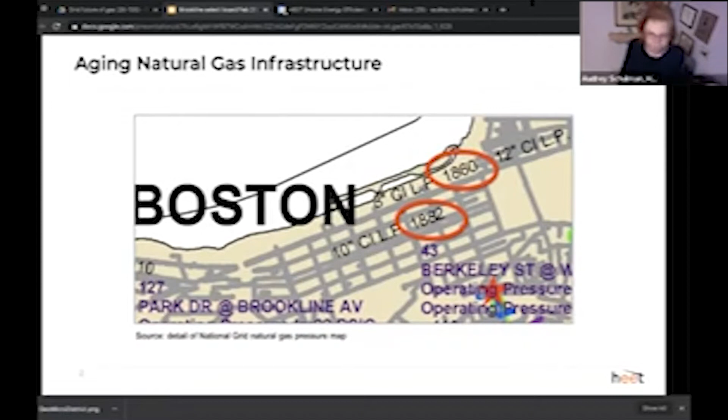As you probably all well know, in the Massachusetts area, and particularly in National Grid area, there's a lot of aging gas infrastructure. Here's a detail of a National Grid map showing two pipes in Back Bay dating back to the 1800s that are still in use. So you can imagine pipes that old are going to leak. And there's also a safety concern. So the gas utilities have a 20-year plan to replace all of the aging leak-prone pipes.

Here are just 5 years of utility reported work sites. And the total cost of this will be greater than the depreciated value of the system in the ground. So they're going to pump a lot of money into this system, and it's a fossil fuel system. And we know in Massachusetts, because of our state mandated emissions requirements, we will not be using gas past 2050. So this approximately $17 billion worth of cost will likely be stranded assets.

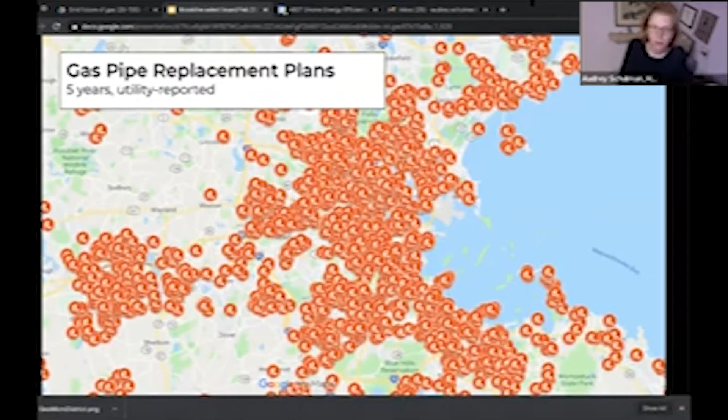So once I learned about this, HEET began to think about what else could go in that would be infrastructure that might be well used instead of wasted. The whole idea is to move buildings towards electricity and then produce that electricity with renewables. One way to do that efficiently is air source heat pumps. The problem is those are most inefficient when you need them most, when the temperature is most extreme, on heat waves, when it's incredibly cold. And so that's not great.

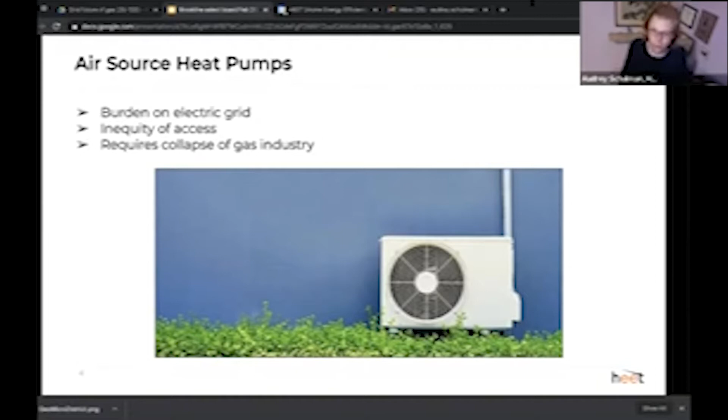The second problem is that you generally have to have discretionary income to afford this. And so not everybody can afford it. And a third, it requires the collapse of the gas industry with all those gas workers. And as it goes downhill, probably the remaining people will be those who cannot afford new heating systems. So it's probably going to go on the backs of the low income, which is something we all want to avoid. So a second option instead of air source heat pumps is ground source heat pumps.

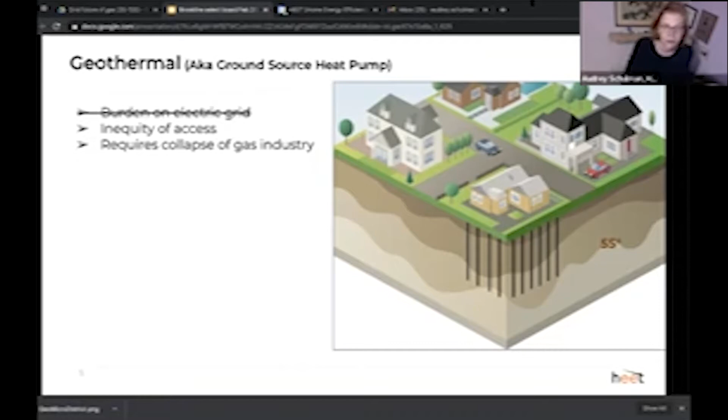And those are fabulous because the ground is always the same temperature, even when it's incredibly cold or hot outside. And therefore the heat pumps can continue to work efficiently no matter what the weather. So it's a smaller burden on the electric grid. But there still, if anything, is a bigger inequity of access because it costs a lot more to install ground source heat pumps. And this definitely would require the collapse of the gas industry if we all moved to these single installations. So instead, we've proposed district ground source heat pumps, or geothermal, and we call this concept a GeoMicro district.

It would be installed by the gas company in its right-of-way in the street, sort of mirroring the gas infrastructure, with a pipe going down the street, with service lines going to each building. The differences are that it would have boreholes that would go about 500 feet or less in the ground, and that it would contain water, just plain ambient temperature water, rather than gas, an explosive substance. It could be installed around any infrastructure that's already pre-existing in the street.

And one of the many great things about installing it this way is that then the gas companies do what they always do, which is install the infrastructure and spread the cost across all of us and over decades. So it's not too painful to any one person.

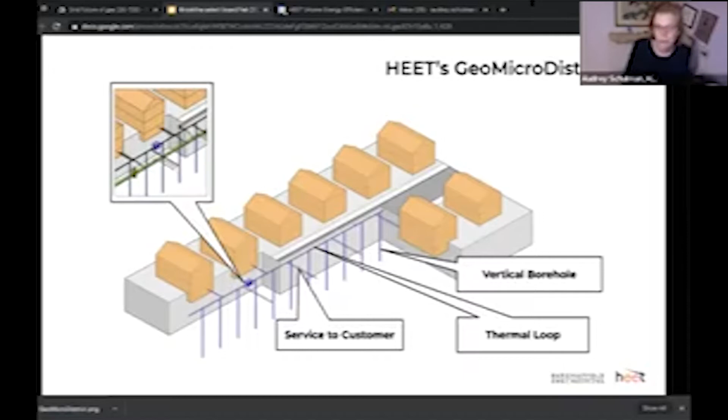This system has a variety of lovely synergies. For instance, if a supermarket is pulling cold off the system for its fridges, then it would be returning that water hotter back into that shared loop, which means that that extra heat could heat buildings down the street.

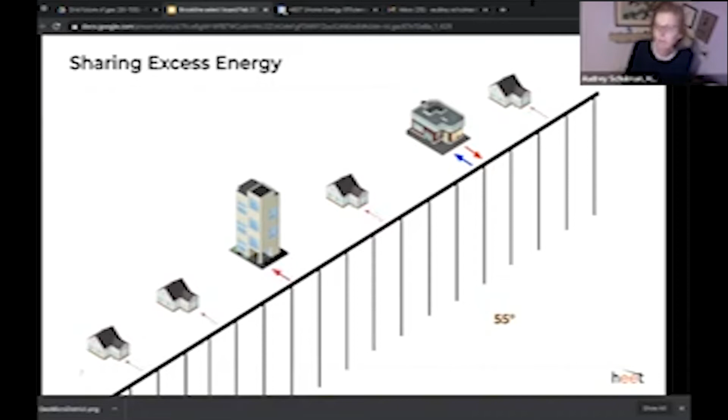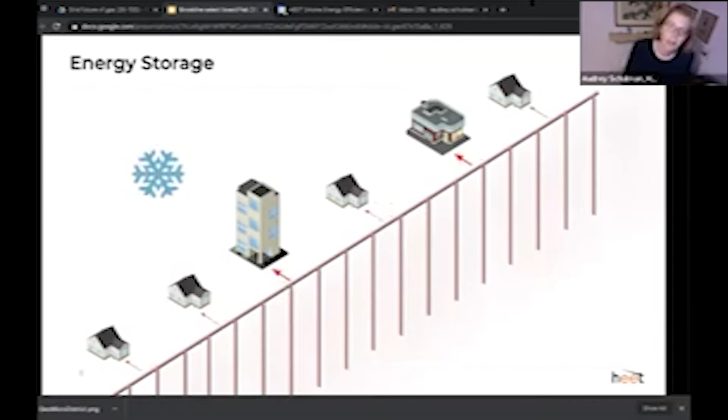The second thing is, during the summer, when you have a lot of excess heat, you can store that heat in the ground to be used later in the winter when you need it. So we came up with this concept and wanted to find if it would work in Massachusetts.

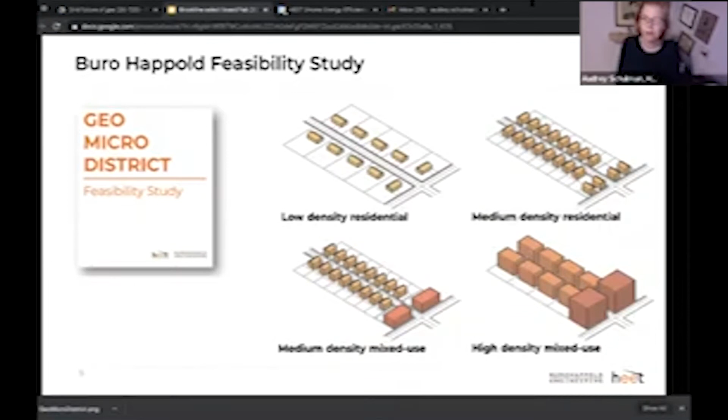So we hired Buro Happold Engineering, which is a company that did New York City's 80 by 50 plan and many other illustrious things. They did a statewide feasibility study, and they did it by creating sort of prototypical neighborhoods that you find in Massachusetts on gas infrastructure, and then figuring out how much energy use each of these street segments would use. And then if they could actually get that amount of energy from this GeoMicro district.

And they found for the top 3 street segments that you see there, everything from somewhat suburban to medium density, mixed-use streets, you get almost 100% of all the heating and cooling that you need. The only one that you would not be able to get enough from the way they did this is the really high density mixed use things that you find in like Central Square, or downtown Boston.

And in those circumstances, what you do is you make the boreholes deeper than 500 feet, or you'd put them in parking lots, or you'd ship some of the excess energy from the other street segments into the city. For instance, you see in that top most suburban street segment that there'd be an excess of cold created by that kind of street segment. So you could move that into the city. And the other one has an excess of heat. You'd move that into the city to help meet its needs.

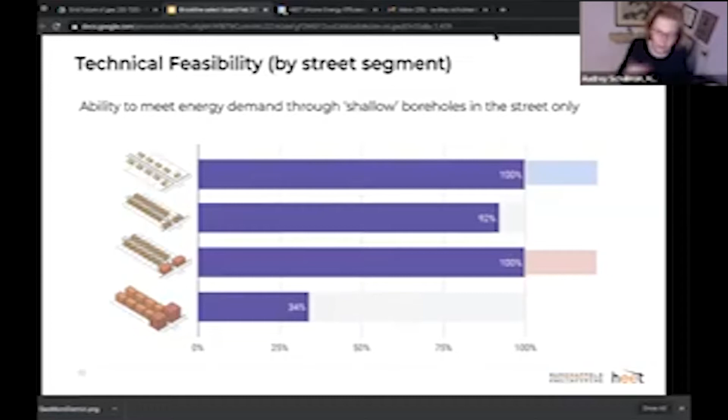So what we'd like to do is pilot this on some street segment and back the gas infrastructure up out of the street and use the gas as a sort of emergency heater just in case. That would reassure everybody that they know they will get heat no matter what. And then iterate on the system each time, backing the gas up out of those street segments and connecting each of the GeoMicro districts to make a geogrid that can share, that they interconnect like Lego pieces.

And then iterate again until the only gas you'd have would be in the very densest part of the cities, or where you have industrial processes. This is the scale that biogas might be able to reach.

Once we came up with the concept, we looked around to find out if there were any possible case studies that might show that this could work. And we found a few of them. One of the best is at Colorado Mesa University. They installed 4 different GeoMicro districts over time, interconnecting them. And they have gas heaters on the system, but they have not had to turn them on, aside from to check that the boiler still works, in 8 years. They're saving over $1 million a year in energy bills.

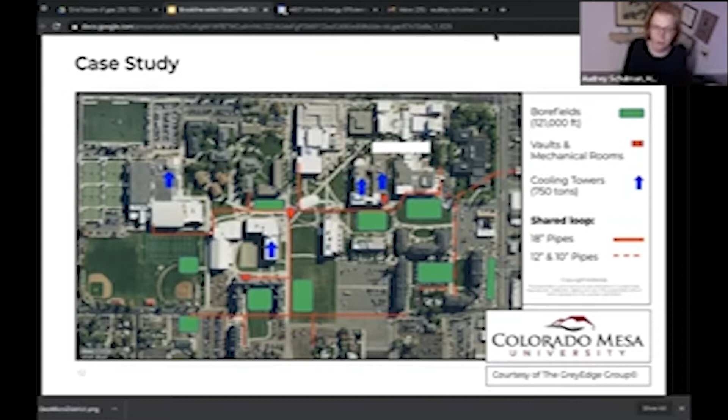So the benefits of the system would be many. I'll name just a few of them. One is that there would be lower energy bills. And we know that not only from the Colorado Mesa University study, but also because it makes sense. With natural gas, you have to import fuel from out of state. In this, you have to build the infrastructure, but you don't have to import any fuel for it.

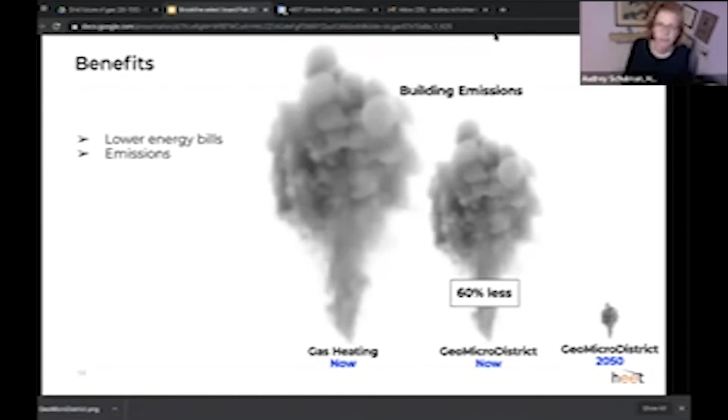Secondly, there would be lower emissions. Because of the way electricity in Massachusetts is produced, the emissions would be reduced 60% immediately. And over time, as the electric grid sourced its energy more and more from renewables, it would go down to almost zero. It would be a safer system because there would not be an explosive gas in those pipes. And for Merrimack Valley, we know what that means.

Finally, it would flatten the electric peak. So because ground source heat pumps are so efficient all the time, they would, in comparison to air source heat pumps, be a much more efficient way of heating and cooling all of those buildings.

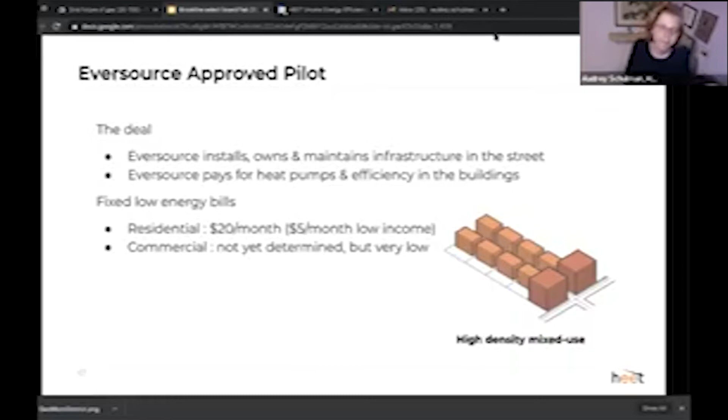So there are some pilots approved now. HEET has managed to talk Eversource into suggesting a pilot, and the DPU, the Department of Public Utilities, has approved it. The deal is Eversource will install, own, and maintain the infrastructure in the street. They will pay for heat pumps and efficiency in the buildings. Residences will have to pay just $20 a month, $5 a month if you're low income. And the commercial energy bills are not yet determined, but should be low.

If you know of any site, please tell me. They're looking for something in the original Eversource gas territory. They want around 100 homes on the same street segment, and a mix of new and existing buildings, certainly with different energy use. It'll be installed this summer, and it'll be turned on this fall.

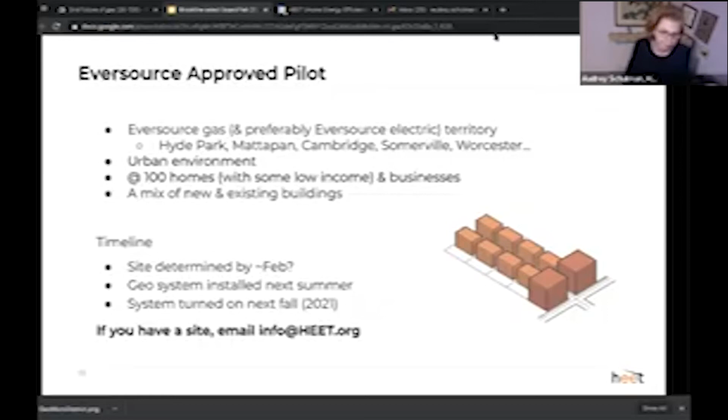There's also a pilot approved in the Merrimack Valley, in the area that was affected by the natural gas disaster. It will be paid by the Columbia Gas sale. It's a competitive grant run by the Attorney General's Office and the Department of Energy Resources. And anybody can do this, to install, own, and operate this system. It does not need to be run by a utility.

Finally, the part that you probably all will care about most is the National Grid request was filed last week. It is for $15.6 million to do geothermal, networked geothermal. They assume that it'll be between 100 and 200 units, both businesses and homes. They will install, own, and maintain the infrastructure in the street. They want to focus on replacing leak-prone gas infrastructure with geothermal.

And they want to work with low income and environmental justice communities. And they want to potentially reduce the investment in areas with gas constraints. They will pay for the heat pumps in the buildings. They want the residential customers to pay $150 per month for 2 years, low income to pay $112 per month for 2 years, and commercial $225. And they want customers to pay for any other new appliances they might need aside from the heat pumps to replace gas appliances.

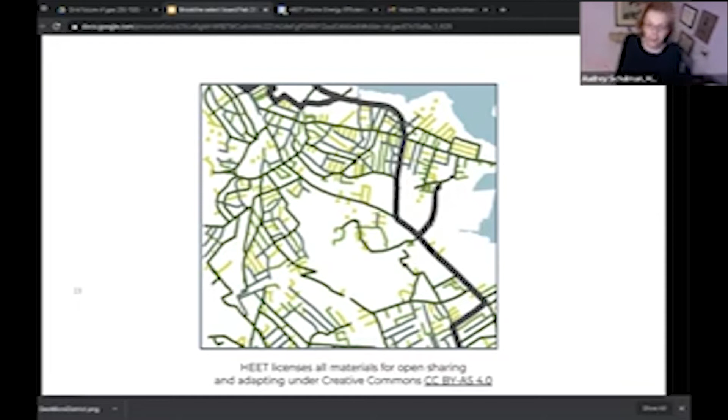Everything we do is open sharing and adapted under Creative Commons, so just refer it back to us. And here are some resources and references. That's it. Thank you.